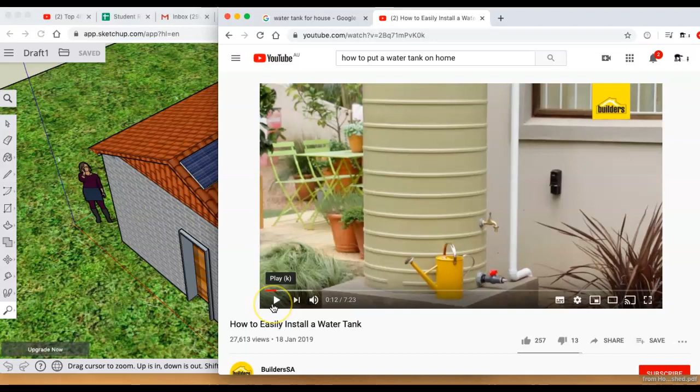Hi girls, we're going to have a look at how to make a water tank. So first, I think we should watch a video on how to put a water tank in your house. So let's go.

First thing that you need to do is actually select where you want to put your tank. Now there's a few key factors. Obviously the aesthetics of a tank is not always ideal, so you don't want them in a perfect little courtyard area here if you don't really want it as a focal point. Also, you've got to consider the water catchment area. So you're going to have a look at your roof.

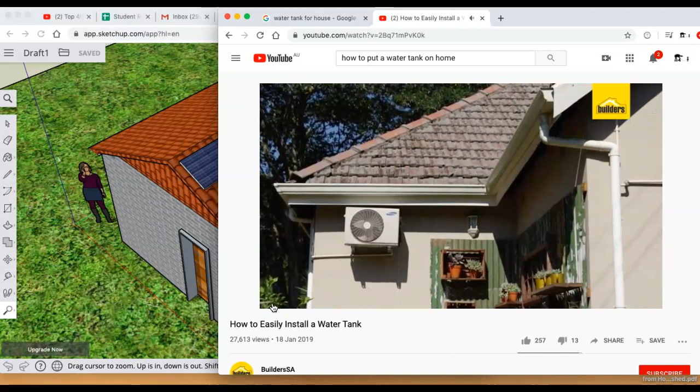Remember, 1 square meter of roof area with 1 millimeter of rainfall coming down is equivalent to 1 liter of water captured. So you want to select a roof where you've got roughly enough catchment area to start filling your tank. I'm looking at this portion behind me. We've got roughly about 20 square meters of roof here, so 20 square meters at 1 millimeter of rainfall is going to give me 20 liters.

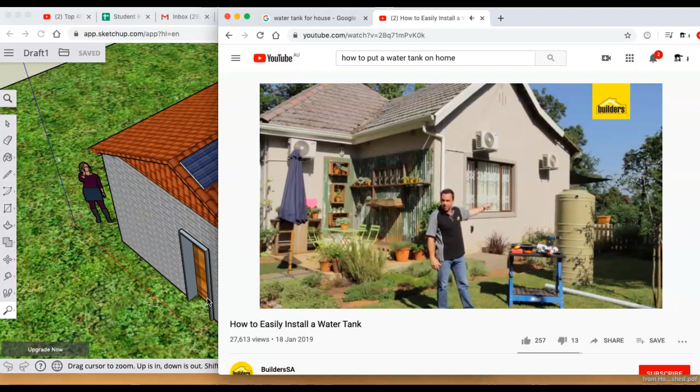Now obviously we're going to get more than 1 mil. 10 millimeters is going to be 200 liters. My tank that I'm using is a 750, so about 40 millimeters of rain, and that tank is going to be overflowing. Another key point is to try and keep your tank as close as possible to your downpipe. That way you don't have to rework the pipe work as much to get that water into your tank.

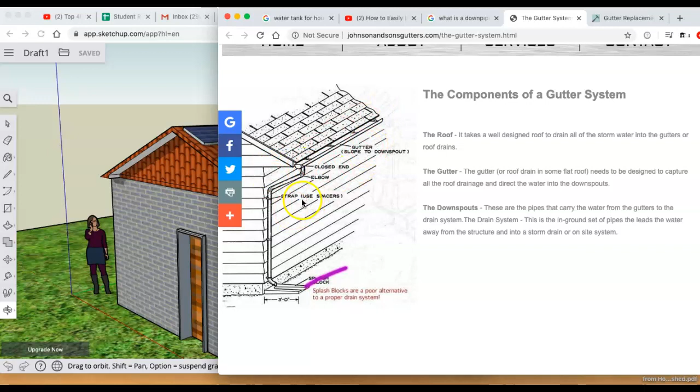Now I've chosen my final spot. The first thing we're going to do is we're going to make a downpipe on our house. Normally a downpipe is connected to a gutter and that comes off your roof. However, as this part of our syllabus is more about your ability to 3D model than to build a house, if you don't want to go full out with the gutter and you just want to do the downpipe, that's fine too. As you can see in the pictures, the downpipe is coming off the roof.

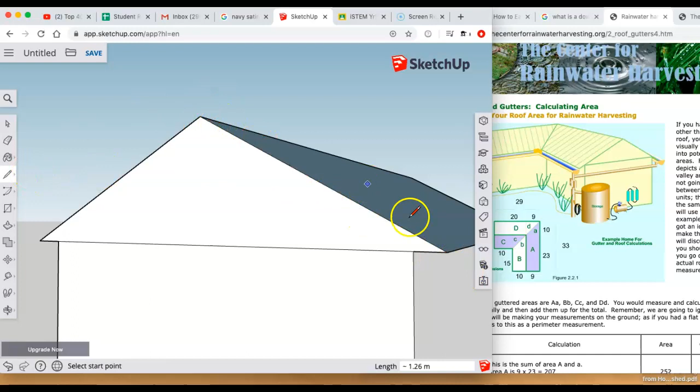So when I build my house or my roof, I'm actually making a little portion of the roof come out like that. I would just include a mention of the fact that if you end up with a roof with a face missing, like what Lola did in class, you just have to use the line tool and redraw the lines around it to make it appear again.

Get started on our downpipe. Basically what I've done is I've created a circle up here using the circle tool. Just click on the face, drag it out, and then using the line tool I found the center and I dragged it out.

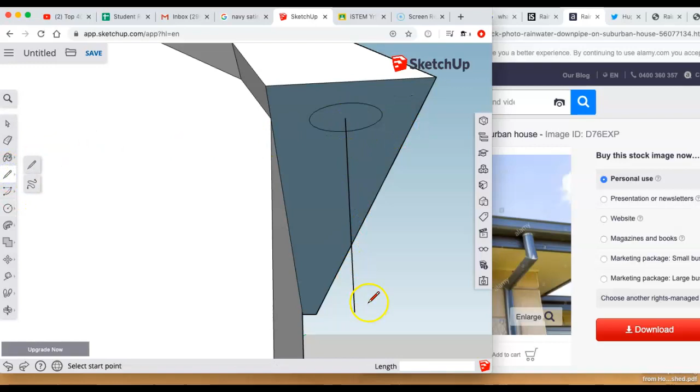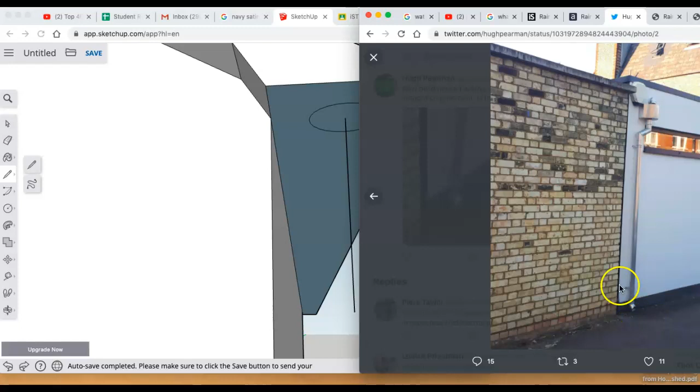Now the two characteristics of the downpipe we're going to model is the fact that it curves in and touches the wall on most houses, and secondly at the end of the downpipe there's always a little curve so that the water can run out, and generally you'll see that it will run into a gutter like that, but we're just going to make it curve out for the purpose of this.

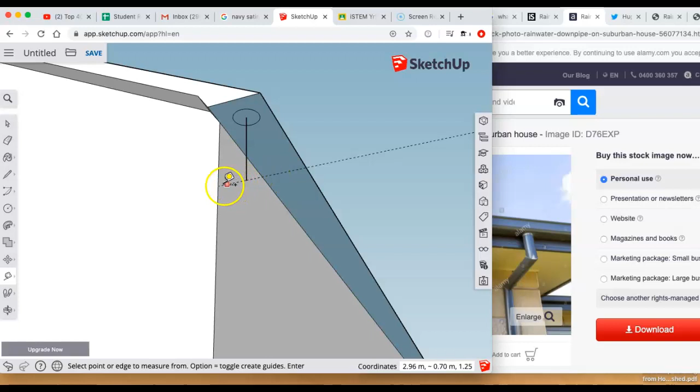For the pipe curve into the house, we're going to use the measuring tape, and we're just going to work out at what point that line hits the wall. So you see it hits the wall here, and what that does is it provides you with a nice line between your original line and the wall, and this is because we're going to use the curve tool.

Now place your curve tool on that line that you just made, and then make it so that it's horizontal, then click, then go to the next part, click, and you'll start drawing a curvy line. Now if you draw all the way to the wall, your pipe is going to be inside your wall, so you really want to just measure it sort of going towards your wall slightly, and then after that just create a line all the way down towards the floor.

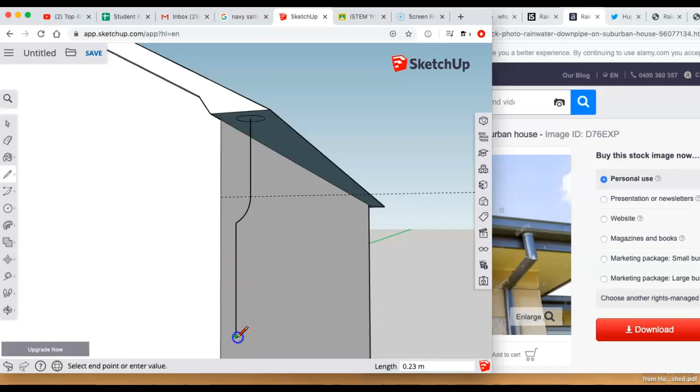Go out again, we want the circle to curve this way. So we're going to grab our measuring tape again, and we're going to measure out from the wall, and then using our arc, make sure that it's set on green, and we're just going to pull it out from the wall like that. It's a tiny bit.

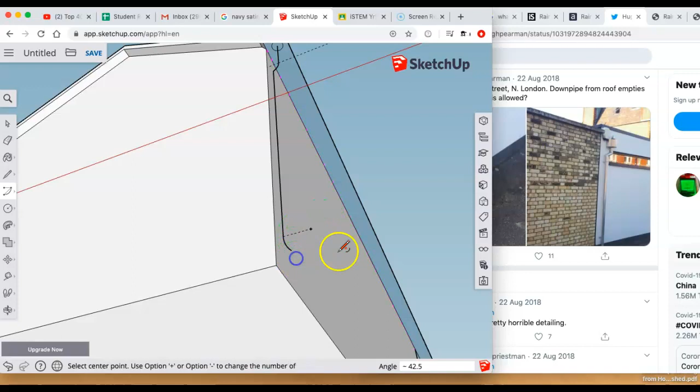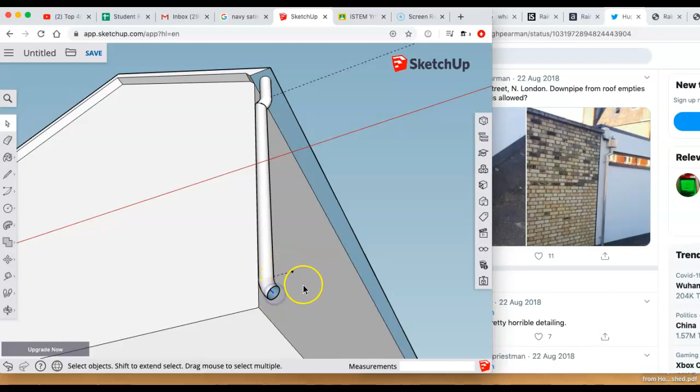As you have probably guessed, we click on our follow me tool, go to the top, click once, and drag it all the way down. Should be easier for you. It just tends to lag whenever I'm on a video for some reason. We've got a lovely pipe there, and then I just delete the end and that annoying line in there, and voila, you have your pipe.

So the type of pipe that we're going to do now is we're going to leave that part here because we spent a long time setting that up, and if you'd like to then connect that off to drip irrigation in your garden, you can.

Sorry, my dog's in a bad mood, I think.

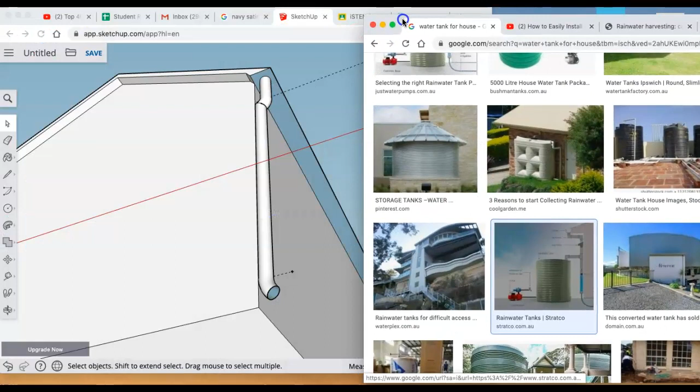Anyway, then we just want a pipe that goes out and down like that, and you'll see in the video that's how this guy ended up installing his pipe. He basically just broke off that bit of his pipe and put that there in his water tank. So we're just going to do this though, because I don't want you to undo all of your good work. And some of you might not want a water tank. Some of you might just want a pipe, so I just thought it would be useful to have that there.

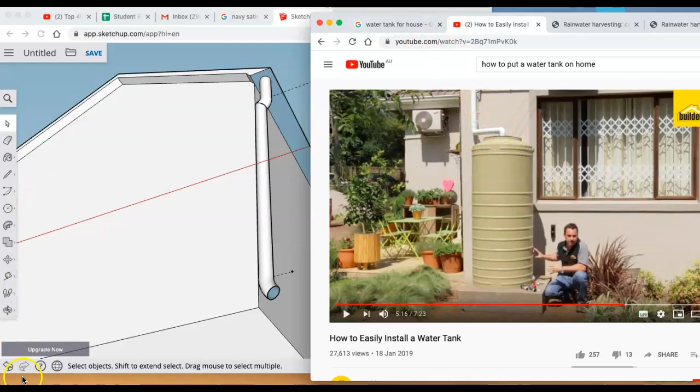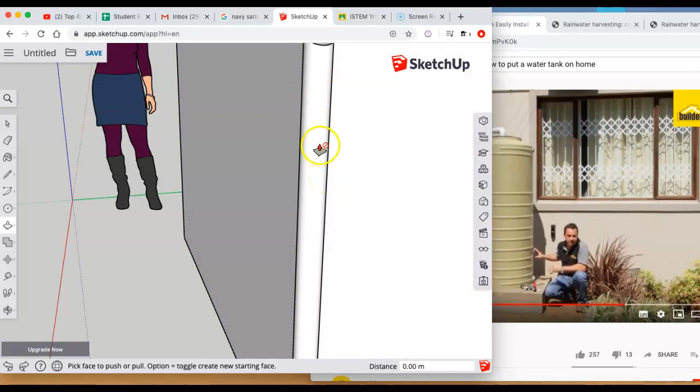Okay, so let's start making the curve in the pipe. What you'll notice about your pipe is you might think, oh, I want to put a circle here and then push and pull it, but you'll find that because we're using the free version of SketchUp, it doesn't let you do certain things. So in my other programs, I would probably cut into that using a cut tool, but we don't have any cut tools in SketchUp, so instead what we're going to use is the follow me tool again.

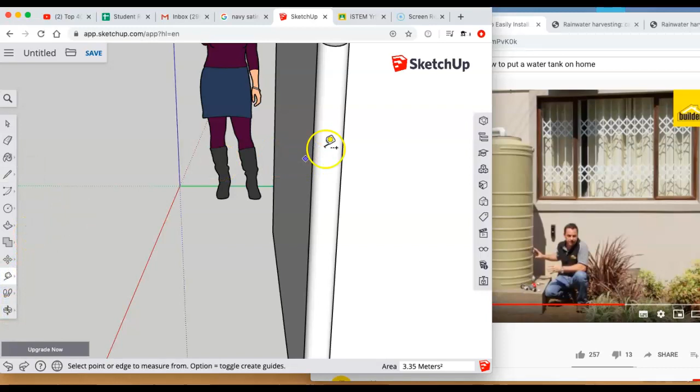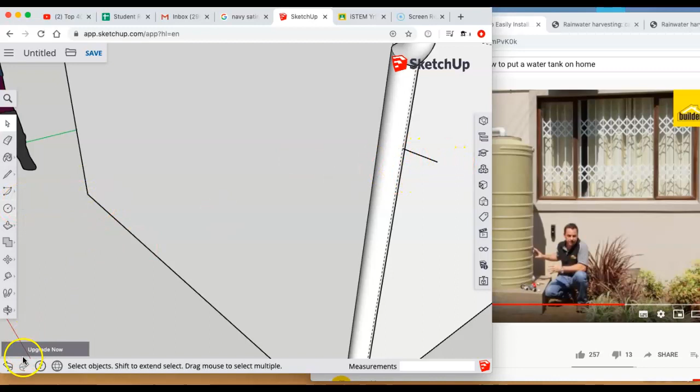So I'm going to try and find the middle of this pipe, I think like here. Let's use the measuring tool again. Kind of put a line there where I think the middle is. Then I'm going to extend out with my pencil like this. And just to give you an idea, we're going to stick a circle on the end and then pull it back.

So now to create the curved part on our pipe, I'm going to just create a source line with my measuring tape so I can create that curve. So making sure that's on green, just creating like a curve coming out of there. So that'll be going into our water tank. Oops, that didn't look great. I'll just do it again.

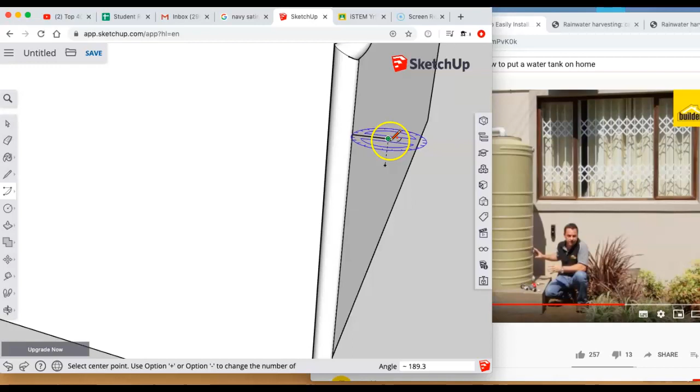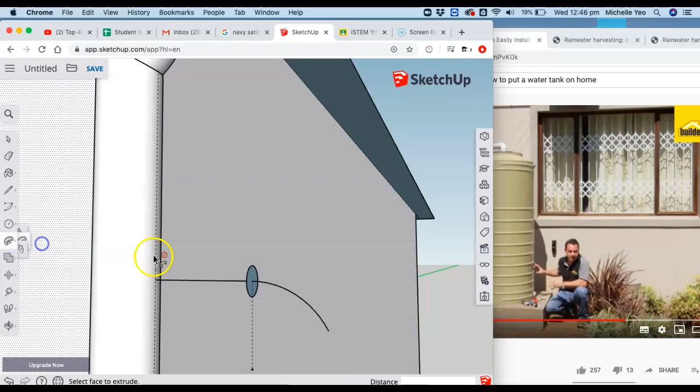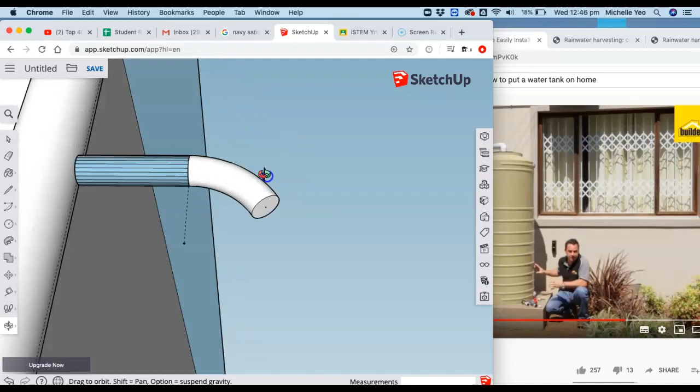There we go. So what I'm going to do now is I want to stick a circle right where the straight part meets the curved part, just because I like making it easier for myself to do the follow me tool. So grab the follow me tool, pull it out there, then I'm just going to grab the follow me tool and pull it there. I'm just going to redo that.

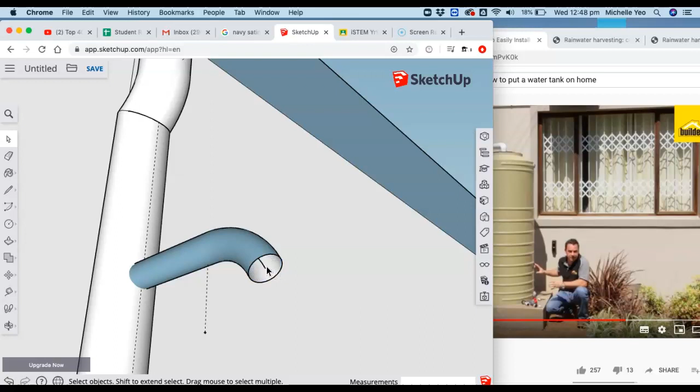Hang on one sec. So I use the follow me tool for the curved part, but what I'm actually going to use is the push pull tool just to pull it back there, just because I wanted to make it intersect nicely with the pipe. And then to make it a pipe, like I did last time, I deleted the outside and I deleted the inside. There we go, a little curved pipe.

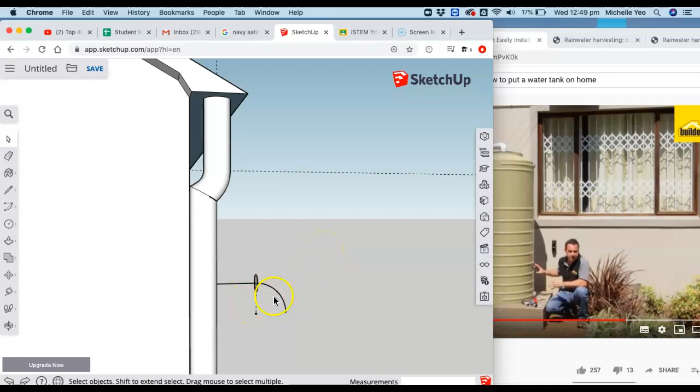If you're following me exactly, I didn't like the curve, so I went back and recurved it again. But to do that, I guess what you would do is you would just undo what you've done, add an extra line down there, and then use the follow me tool and the push pull tool again to get what you're looking for. There we go, much more curved. There we go.